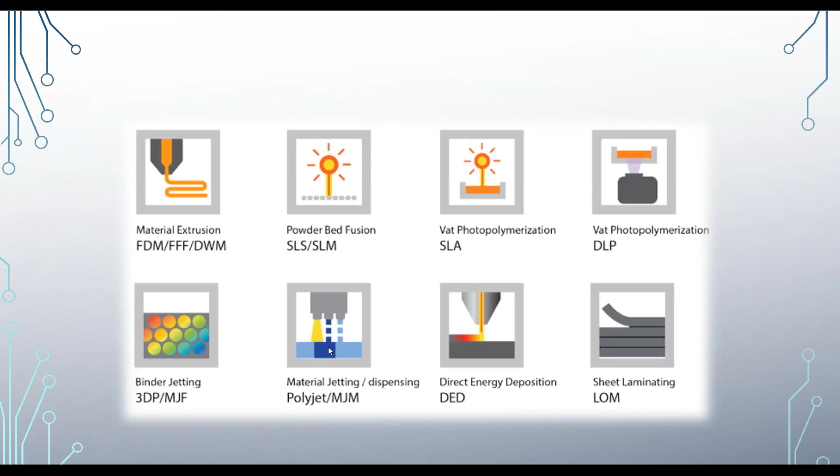The main focus of 3D print technology we're going to look at today is the process known as stereolithography. Stereolithography is the process of solidifying a photopolymer resin layer by layer that is activated by a UV light engine. There are a total of 3 different types of stereolithography.

When people do their research, most will think stereolithography just means using a laser, which is on the left-hand side. This is the very first form of stereolithography, but it also goes out into DLP, which is the most popular, and then there's a newer form of stereolithography called mask SLA.

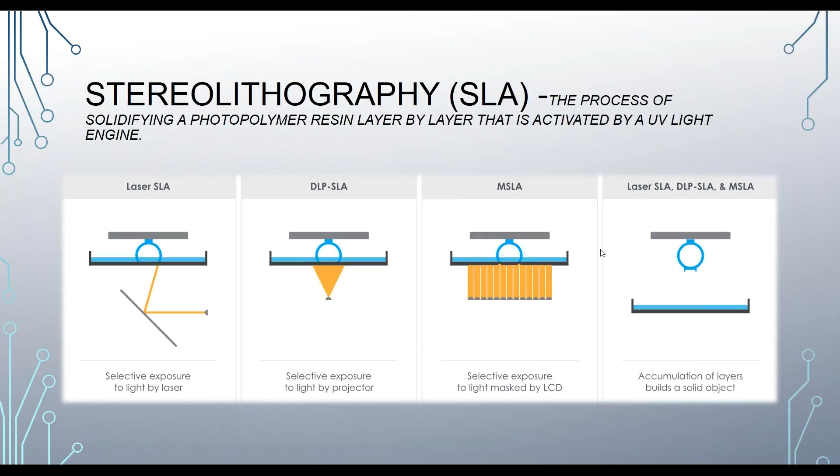Let's see a further breakdown. All of these are stereolithography, but there are 3 different types. The least expensive type you'll see out there today is stereolithography laser. We have a UV laser as a light engine, and a series of mirrors that directs the laser into the resin vat to cure the resin to the build plate. The 3 main competitors I see in the dental industry right now are Formlabs, DWS, and XYZ has a 3D printer that prints with stereolithography laser.

There is a downfall to this technology because it uses a laser. It takes a long time to actually print the object because it has to draw the full image for each layer being cured. So it's a very slow process.

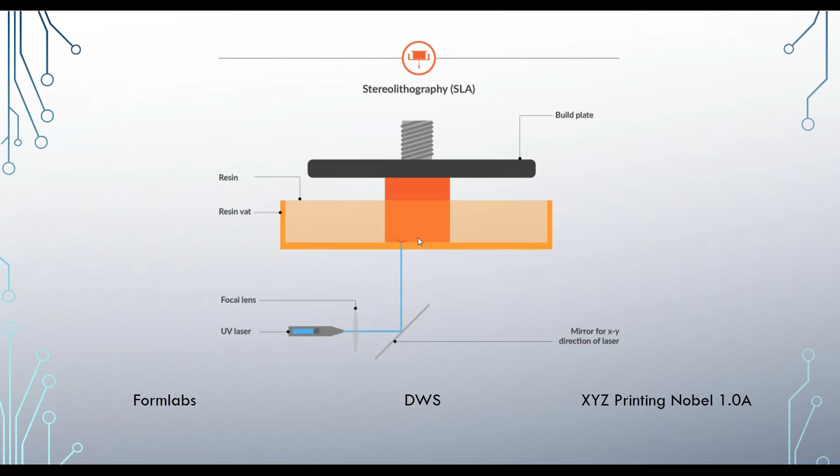The most popular in the dental industry right now is considered DLP stereolithography, digital light processing. This is an extremely cool technology that's the most popular in the industry right now. It actually uses a DLP chip, invented by Texas Instruments. The process works with a DLP projector at the bottom that projects the whole slice all at once to cure, the whole layer all at once, and it repeats that process over and over again.

So what would take the stereolithography laser method maybe 10 seconds a layer or even longer, it's going to take a DLP projector just 2 to 3 seconds to cure a whole layer, depending on the resin type.

Now the main game players we see with this type of technology is obviously ASIGA, which Whip Mix distributes for in North America. There are different competitors out there too, like Carbon which uses DLP technology, NewPro 3D, EnvisionTEC, Kulzer, which is also a B9 Creations printer, SprintRay, Kudo3D, 3D Systems, and Ackuretta.

This is the most popular form of technology for dental 3D printing. It's going to be the fastest, and it's actually the most accurate to date.

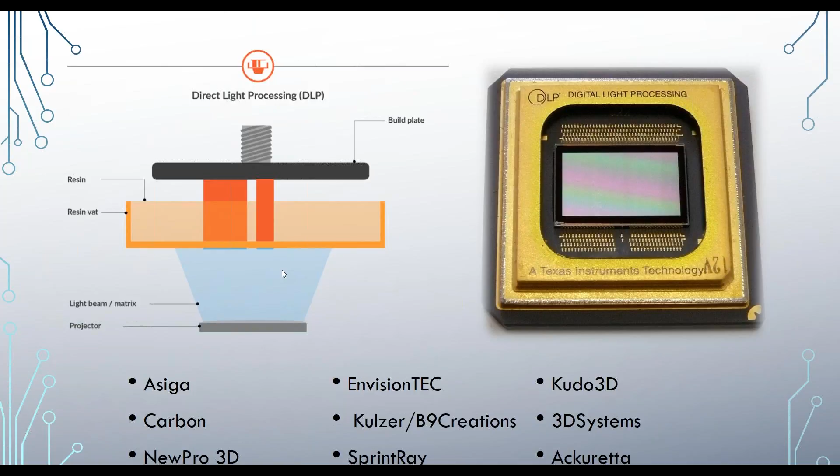Now there's a new form that has come out, very similar to DLP, but instead of using an actual projector itself, it has an LED light and an LCD mask, which masks light out and allows the image to shine through. This is really cool technology, it's really inexpensive, and it's still in the process of becoming more reliable.

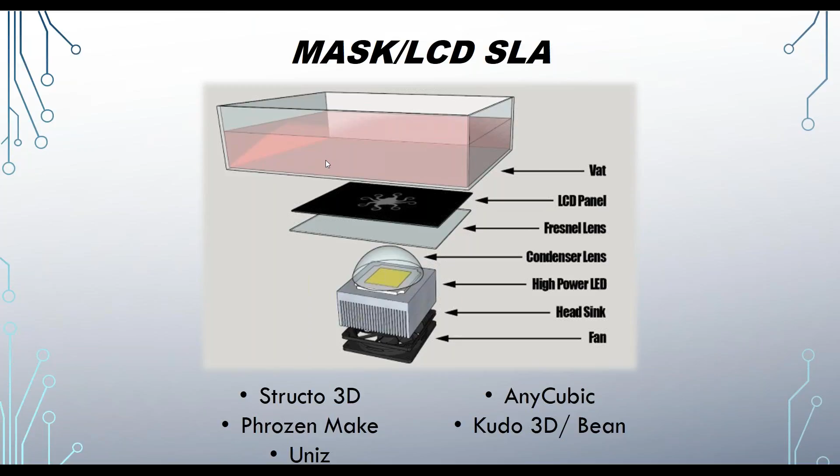The main players we see in this would be Structo 3D, Phrozen Make, Uniz, Anycubic, and Kudo3D has a Bean printer. It's very cool technology, but it hasn't been proven for accuracy that I've seen yet. I think we'll probably see it become better over time.

Now a lot of questions I get are like, they'll purchase a 3D printer and watch it work, but they don't really understand how or what is actually going into it. So how does my 3D printer really work?

As we can see on the right-hand side, there's an animation happening showing the separation process. The very first layer of any 3D printer for stereolithography is going to have a burn-in layer. This is the most crucial layer, because if the burn-in layer does not stick to the build plate, then nothing thereafter will.

After the burn-in layer, we have what's called the normal layers. With that, there's a reduced exposure time needed to cure the actual layer itself, the layer thickness, and then a little bit of bleed-through to allow it to adhere to the previous layer, which is known as cure through.

After that, there are some speeds that need to be taken into consideration depending on how fragile the resin can be, so that'd be approach and separation speeds. There are delays between the layers: after approach, after exposure, after separation.

Another part that goes into 3D printing for stereolithography is XY scaling, which compensates for the amount of resin or how much the resin is shrinking. And then there's XY compensation, which compensates for growth.

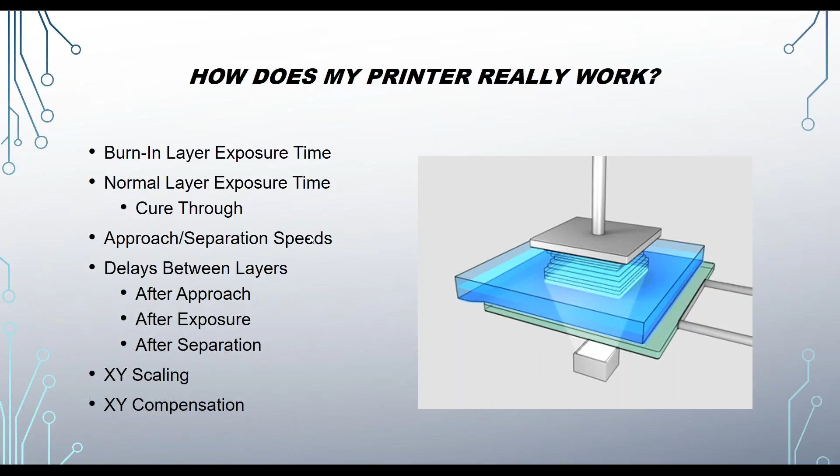As I mentioned earlier with the exposure times, there is a proper way of calculating exposure time. This is something you don't see up front unless you have a completely open source 3D printer. ASIGA, for example, is completely open source, so we can use any photopolymer resin from any manufacturer and calibrate it to work in the printer itself.

Each resin has a particular cure curve. The light engine is measured in a number called milliwatts per centimeter squared. So the actual dosage of light needed to cure the proper layer is milliwatts, the strength of the light itself, times seconds. That's how we can figure out the dosage of light.

So going a little backwards in thinking, if I wanted to cure using this table, on the bottom part of the graph, the X part, you'll see 100. This would be the amount of dosage needed. At a dosage of light of 100, you'd be able to cure a total thickness a little bit greater than 150 microns.

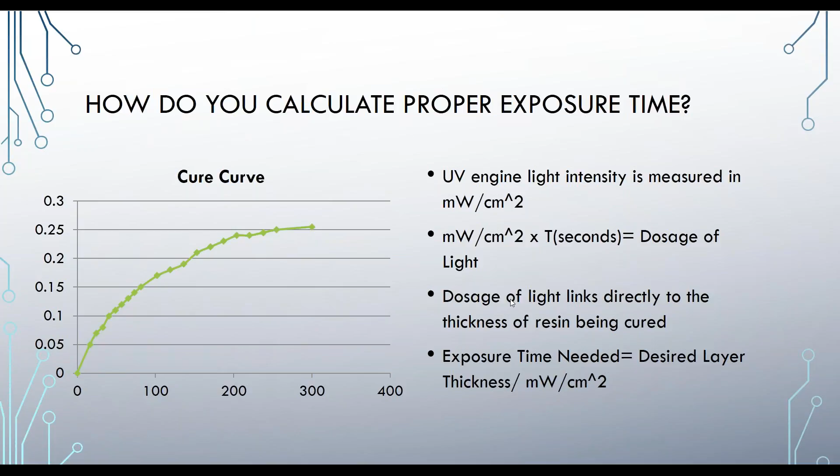So with that, I would take the light intensity, let's say 10 milliwatts per centimeter squared, and divide that into the dosage of light of 100, which would give me 10 seconds. So for this exact resin, if I wanted to cure 150 microns, I would need 10 seconds of exposure with that current light. This is a little more technical, I'd be more than happy to go over this at a later date with anybody.

When you're purchasing a printer, one of the most confusing parts is defining how accurate the printer itself is. For stereolithography laser printers, the XY accuracy is going to be as accurate as the laser itself. The most popular 3D printer for stereolithography laser has a minimum feature spot size of 140 microns, so the smallest feature you'll be able to print is 140 microns.

Now DLP uses pixels, so if you're looking at your computer screen, that's made up of thousands of pixels. It's similar technology for the DLP projector, and that can have a minimum pixel size I've seen down to even 25 microns, extremely small, which would make it extremely accurate. Mask SLA is very similar, it has a pixel size as well, which I've seen around 75 or 100 micron XY pixel size.

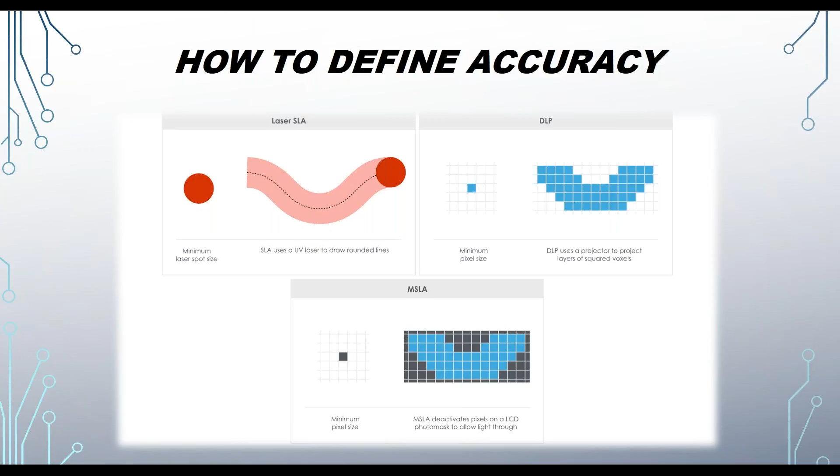So when we're looking at 3D printers, if they state you have an XY resolution of 25 microns, that's going to be extremely accurate, versus let's say if they have a printer that says I have an XY resolution of 140 microns, it is not going to be as comparable for precision. It will never be able to get the proper amount of detail.

Something else that's confused is Z resolution. I see this on a daily basis, I look at 3D printers every day from other manufacturers, and I always like to see what their resolution is defined as. A lot of competitors will only show the Z resolution. Well, Z resolution really doesn't define the true usable accuracy, it's more or less going to give you a higher quality surface finish.

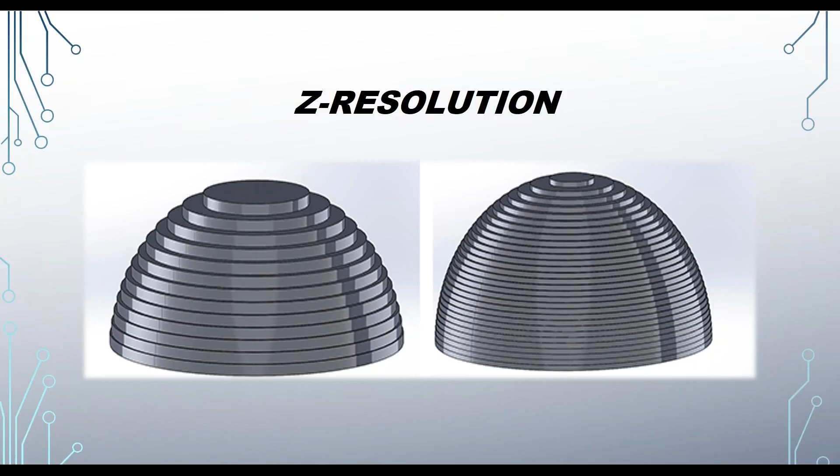So we can see between the two structures, the structure on the left has a more stair-stepped feature versus the object on the right. Now there's a trade-off. If you go into a higher Z resolution, printing in thinner micron layers like 50 microns versus 100 microns on the left, the object on the right is going to take twice as long to print versus the object on the left.

So this is something you'll have to work through with the end users, figuring out what layer thickness you want to print a structure in. But whenever you're looking at 3D printers and they're defining the accuracy, make sure you look at the XY precision first. If that is not below 100 microns, I would not even entertain it as a dental 3D printer.

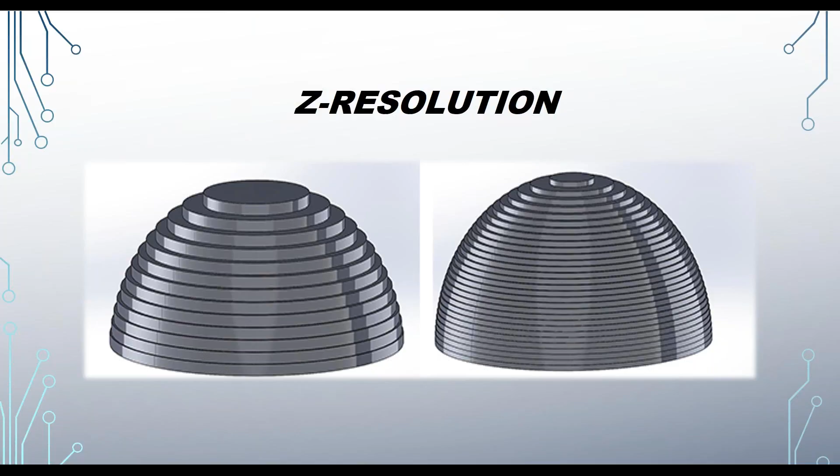For Z resolution, you'll want to see really anything. If you can get down to 25 microns or 10 microns, that's great. But realistically, mostly everything that all of our laboratories print is going to be at a 50 micron resolution up to 100, depending on the object itself.

So if anybody has ever received a model from our print services here at Whip Mix, and received a dental model from the Asiga 3D printer, the first thing most people notice is that the surface quality of it is so smooth. This is how the Asiga printer is able to achieve that. So if you're looking at 3D printers, make sure they have this feature of anti-aliasing. It's super cool.

Besides stating on paper what a printer can actually achieve, we need to show the actual precision at hand. So how can we prove the precision of a printed object?

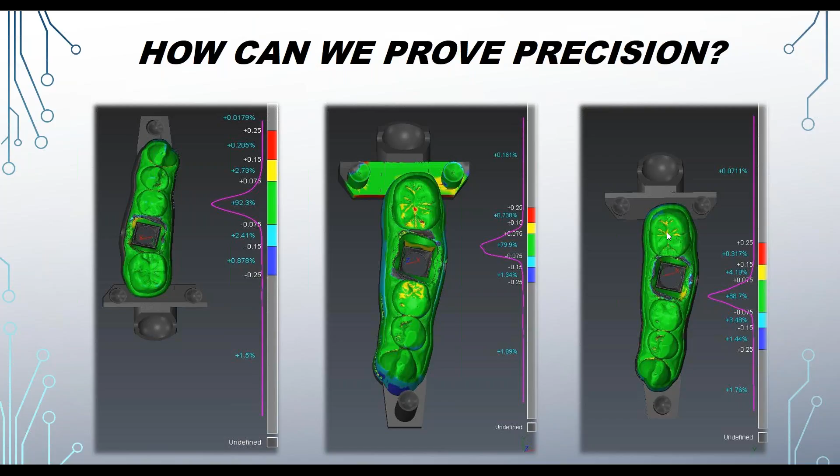So how can you compare this on your end? It's very easy. If you have 3Shape, exocad, or dental wings, there's a process for doing this. With 3Shape, if I wanted to compare my printed models to the digital model to check if I'm losing precision or questioning their accuracy, I'd simply create an order form for a coping.

I'll place a pre-preparation scan as well. From here, when I open up the scan software, I'll scan the model that I printed, and for the pre-preparation scan setting, I can import the scan.

On the bottom left of the order form in 3Shape, I can import an STL file or a DCM. So I'm going to import the STL file of the model that I sent to the printer and overlay the two.

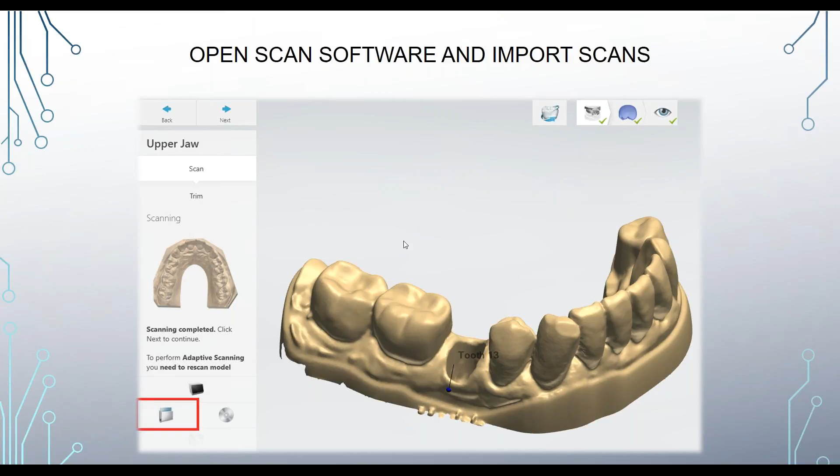After aligning those two, I can do a 2D cross-section and see where I'm deviating. This is a great way to do a quality in-house check on your 3D printer to make sure it's printing the way it's supposed to.

With this model, I had a difference of 65 microns on my interproximal contacts, which is pretty large. If I was to do a porcelain buildup on this, I would have made my contacts way too heavy, and the doctor receiving my final restoration would have been irritated that he had to adjust so much.

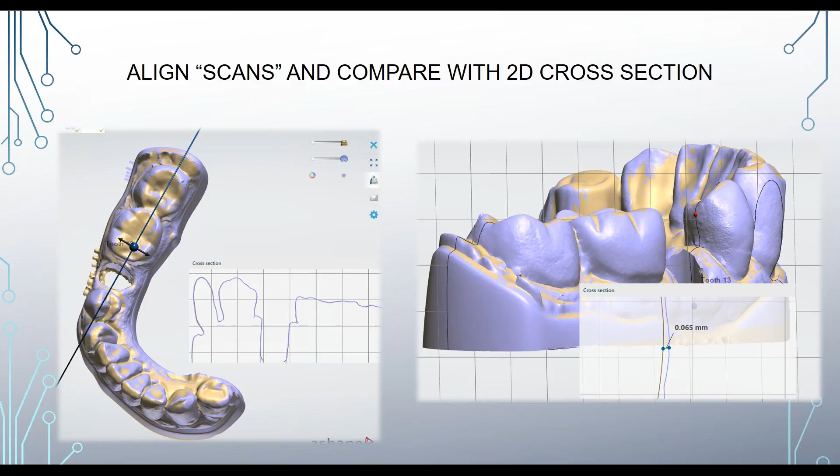So you'd have to go back to the drawing board and figure out if it's your printer or the resin you're using, or just contact tech support depending on who you purchased the printer from. This is a great way to check and validate that your 3D printer is printing accurately without purchasing an external comparison software.

So we've covered 3D printers, but here's what you need to know about 3D print resins—this information is extremely important. A lot of printers come in multiple wavelengths, 385 and 405 nanometers. At Whip Mix, we only sell the 385 nanometer light source 3D printers. The reason is it's a lot easier to work with—the light penetration is controllable, versus 405 which is not as controllable.

It's just all around better print quality for printing clear resins. You can actually print a true clear resin with 385 versus 405. They're going to have tints in it to actually allow the light from not penetrating all the way through.

Now, when you are choosing your printers, if you choose a 385 nanometer printer, you're going to have the best results with purchasing a resin that was manufactured around the 385 spectrum. The same way for the 405 resin, if you purchase a printer with a 405 light source on it, you need to use a resin that is manufactured for that 405 nanometer light source.

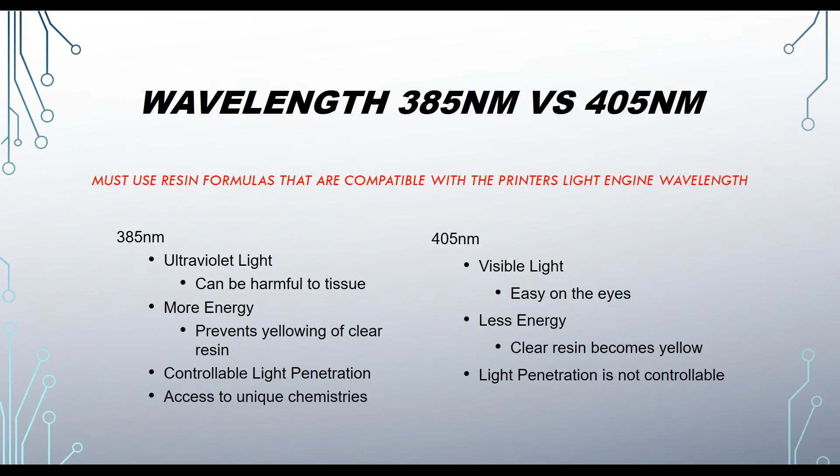So there are health hazards that come with handling resin. If you get it on your skin, you can actually receive rashes and have allergic reactions and dermatitis. So please wear gloves at all times when handling the resin itself.

I know when I first started, I'm guilty. I'd take a print directly off the build plate and grab it with my hands, put it in the alcohol, not realizing that I was exposing myself to multiple chemicals that can be extremely harmful.

Eye contact, if you put it in your eyes, just don't use it as eye drops. Realistically, it can cause issues with excessive tearing, itchiness, even damage to your eyes.

Inhalation as well. Some resins put off a lot of fumes during the curing process, and even in the liquid state, if you smell the different resins, some of them smell really bad. You don't want to huff that in or breathe that in. So depending on the resins, you will want to wear a face mask or a respirator, depending on how toxic it is. And of course, if you ingest any, you can actually become sick to your stomach or even vomit.

So please do not use this as hand lotion. Any of the resins, do not use it as eye drops. Do not breathe it in and do not drink it. It seems pretty common sense, but you're going to get it on your skin, or you could potentially get it on your eyes. So whenever you're handling resin itself, I highly recommend wearing gloves and even protective glasses if possible.

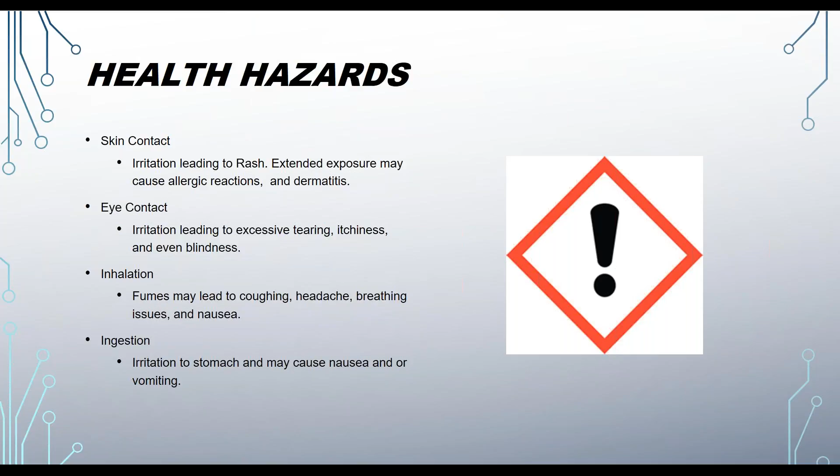Now, how to handle it? Wear an apron or a lab coat. It will stain your clothes, so if you accidentally get resin on your clothes, you will forever damage it.

A great example of this is one of our technicians was moving a resin tray with clear resin inside of it. It looked like it was an empty, brand new resin tray, and he lifted it up and tilted it back. It actually splashed all down his shirt, and it is forever starched. It's extremely stiff now, and you can't get the stain out.

So please, wear some sort of protective clothing, or wear clothing that you don't care if you get resin on it. Vinyl nitrile gloves, safety glasses, a mask depending on how strong the fumes are from it.

Now the ideal print environment is going to be clean, well ventilated. I cannot stress clean enough. Really, if you can put it in a dust-free environment, which is almost impossible in a laboratory, that'd be ideal. Or if you can keep it as far away from the model room as possible, that'd be ideal. Then if you can, have an emergency eye wash station. I know some of the larger laboratories do have that. We have it here at Whip Mix, obviously. And so if you ever get it in your eyes, you can immediately go flush your eyes.

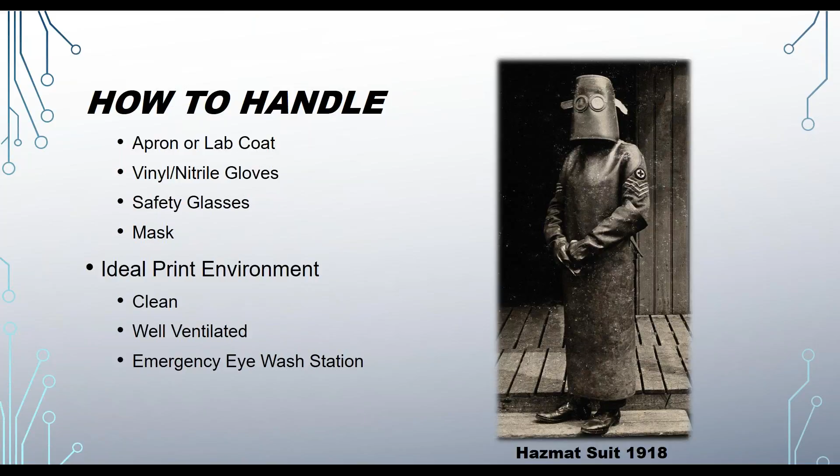So here's some tips for working with resin. When you're using it, it's extremely important to read the instructions of use, because that's going to tell you exactly how long it needs to be mixed for. It'll tell you the daily maintenance of the resin that needs to be handled before printing itself. So please read the instructions of use.

Some resins need to be heated up before using. Some of them do not. Some need to be mixed for 2.5 or 3 hours. Some need to be mixed for 5 minutes. So definitely read the instructions of use to get the best results from your resin itself.

Now, if you ever have any failed prints, a great way to clean your resin to remove debris is to use a paint strainer. I recommend a 200 micron mesh or smaller. The smaller you go, though, the longer it takes for your resin to strain. But 200 microns, or 0.2 millimeters, should be a fine enough mesh to strain your resin.

From there, storing your resin bottles, I highly recommend storing them in a cabinet. If your resin bottle has a lighter colored cap, light can actually bleed through that and solidify the cap onto the bottle, and it's almost impossible to remove. You have to get a couple wrenches out. So please keep those for best results, stored in a cabinet.

And then from there, resin trays, if you're not using them, almost all resin trays are going to come in a cardboard box. Go ahead and place that resin tray into the cardboard box when you're not using it, and then place that cardboard box into a cabinet to prevent light from exposing to it. It is a photopolymer resin, so if light gets to it, it can start to react and cure itself.

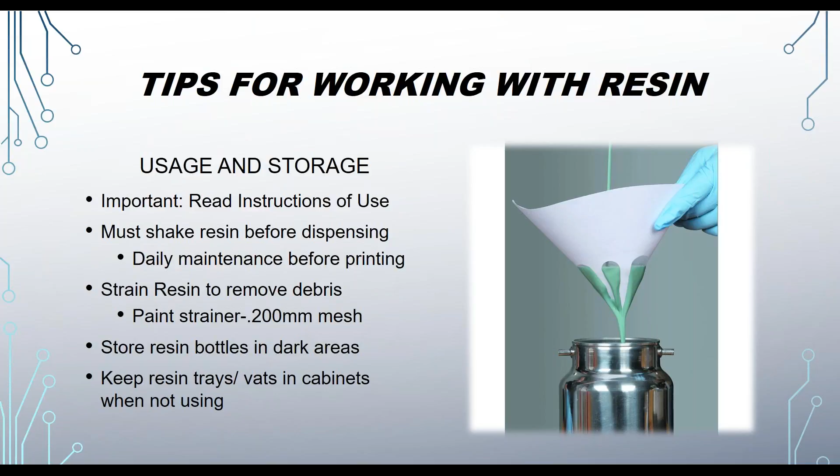So what do you want to look for when purchasing resin itself? If you have an open source 3D printer where you can use resin from other manufacturers, there are different areas you want to look at when choosing the resin itself.

Right off the bat, you want to look for accuracy. Low shrinkage and low warpage are two things you want to look for immediately when choosing a resin. The higher end brands like Whip Mix, Detax, Pro3dure, NextDent are going to have lower shrinkage values. If you go to brands like Fun to Do resins or Maker Juice, those resins are going to have higher shrinkage and extremely high warpage. So they'd be fine for creating prototypes or toys, but not great for dentistry.

A third area you want to look at is making sure the pigment stays suspended. Resin itself is very similar to paint. They have pigments, blockers, and photo initiators inside the resin, and over time they'll settle out in the resin tray or bottle. So you definitely want to mix it up before using, but if you have a resin that can suspend pigments for a longer period of time, you'll spend less time stirring your resin and more time printing, which is what you want.

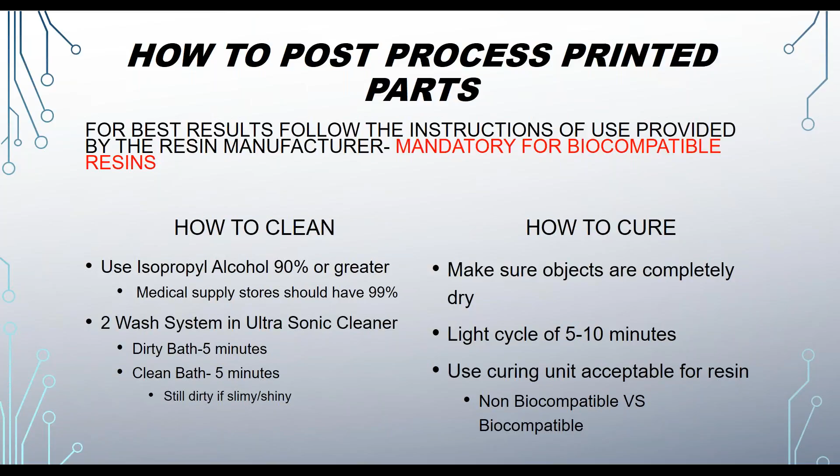Now, for the acceptable curing unit you want to use for your resin, you want to do the research. If it's a biocompatible resin, it may need a curing unit that requires heat and light together, or an oxygen inhibition layer and light together. Versus if it's a non-biocompatible resin, you can use just about any curing unit that fits in the light spectrum that the instructions of use require. So you definitely want to do your research.

Now, I do have a video of how to remove objects from the build plate. There are some ideal tools for this that I recommend: a number 2 X-Acto knife handle—make sure it's the number 2, it's the wider handle, the number 1 is too small—and then a 1/2-inch wide X-Acto chisel blade and a jeweler's hammer.

So I actually have a video here of Whip Mix's own Brandon Smith. Let me go ahead and pull this video up. Now, it may be a little hard to hear. If you have any issues hearing it, we will send this link to this video afterwards, and I'll try to also commentate for it.

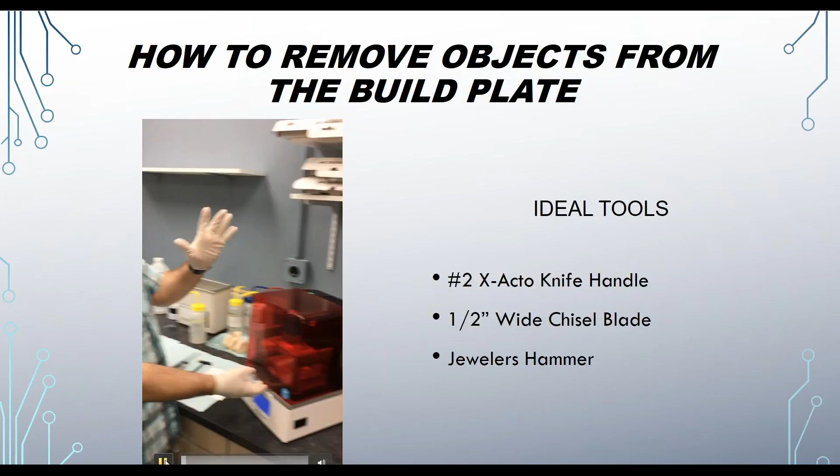All right, this is Brandon Smith with Whip Mix, post-processing models off of the Max printer. The post-processing is the same for the Max as well as the Pro 275.

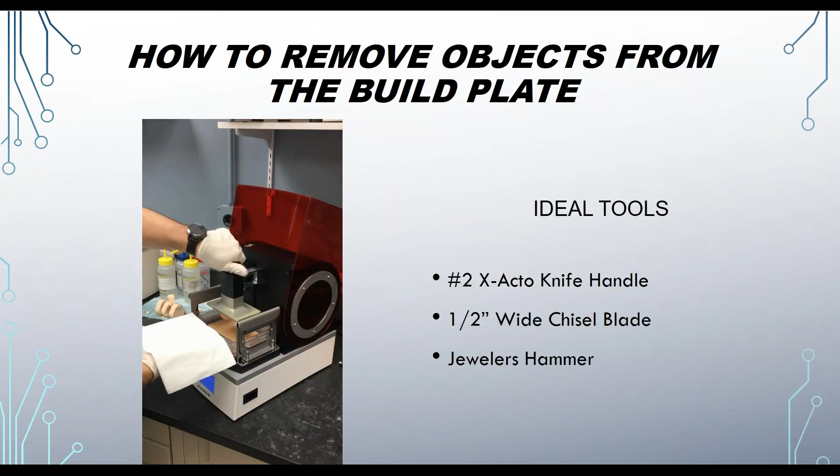So what he's going to do is place the models to the side, using an X-Acto knife chisel blade and a gold-tipped hammer to remove these models. You simply place the chisel blade right to the base of the model and slowly tap. You can see with that tapping, the blade itself will get underneath the edge of the model, and then the model will just pop right off.

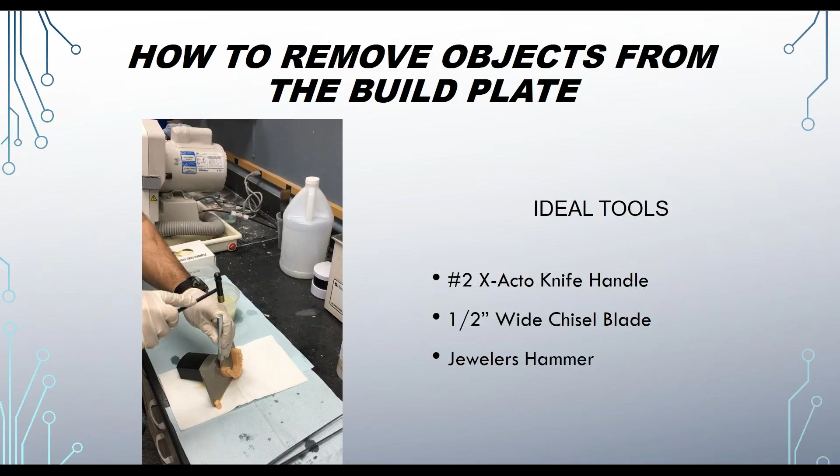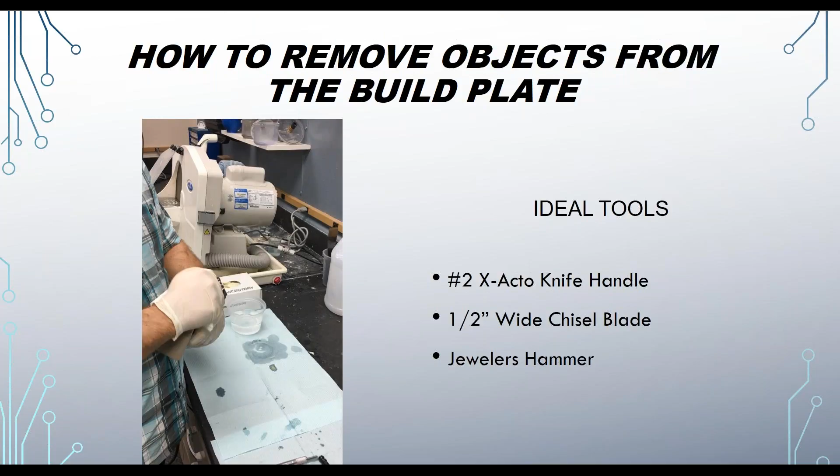For 5 minutes in the ultrasonic, and then we'll put them in a clean bath for an additional 5 minutes in the ultrasonic. Once they come out of here, they'll go into a light cure box for an additional 5 minutes, and then that finishes out the post-processing. Just make sure that before you put them in the light cure box, you have completely dried the models, with no resin or alcohol residue left on them, so that when they come out, they're not tacky.

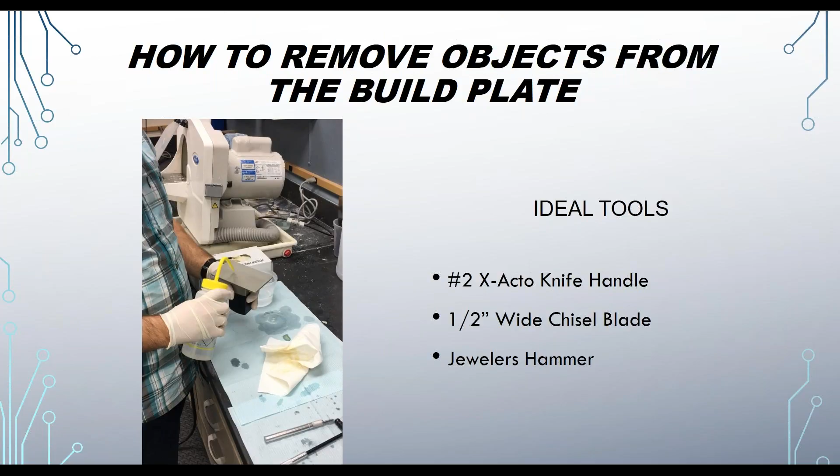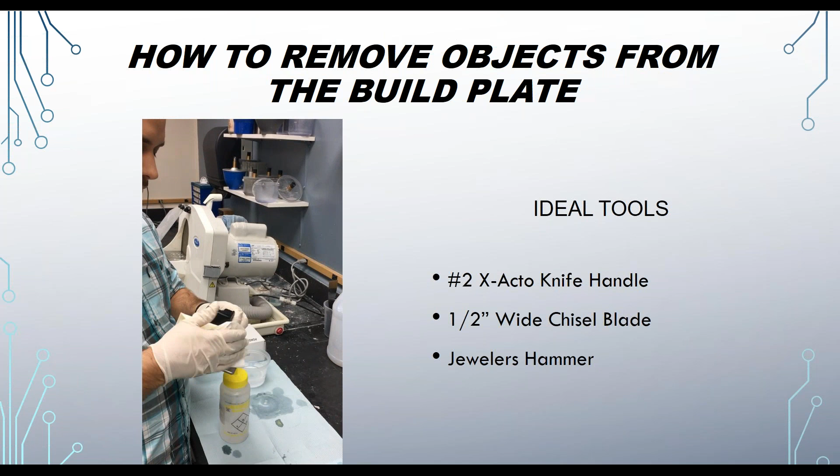To clean your build head, just use a regular paper towel and some of the alcohol you use for post-processing, which is just regular IPA alcohol—you can get it at any drugstore. Squirt a little on your build head and just wipe it down. Make sure that when you do this, you always wear gloves. This resin can be toxic before it's cured, so you don't want to expose your skin to it. Once you clean your build head, it goes back in and you're ready for your next print job.

And total post-processing, 15 to 20 minutes? Yeah, about 15 to 20 minutes. Thanks, Brandon. You're welcome. So we'll send that video to everyone.

As you can see, it's extremely easy to remove the objects using these tools. From there, you'll take the models out, put them in the first bath of alcohol, considered the dirty bath, and run that for 5 minutes or so, depending on the instructions of use. Then you'll take the objects out and place them into the clean bath for another 5 minutes, bring them out, let them air dry or blow them off with compressed air, and then place them into the UV curing unit required for that resin.

If it's unpolymerized resin, so uncured resin, it's hazardous to the environment. If you need to dispose of uncured resin or contaminated resin that you cannot cure, you'll need to check with your local government on how to do this. This is regulated at the city level.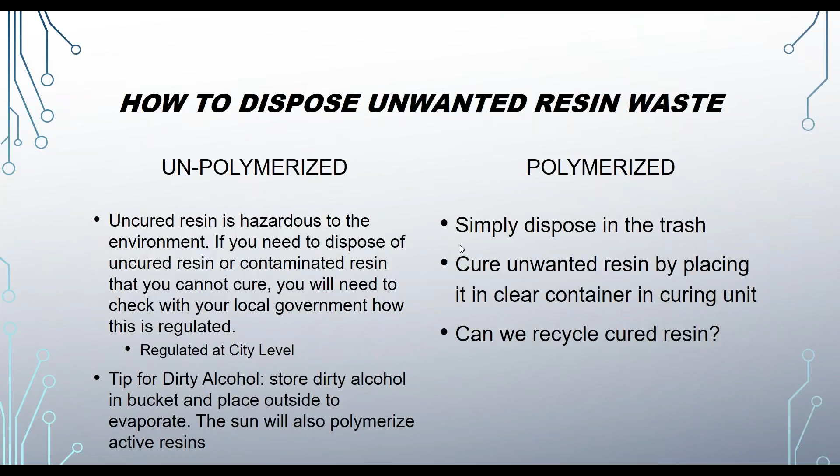All right, so I have some 3D printing design and support tips for you guys.

The most popular thing 3D printers are currently used for is models. Obviously from intraoral scans, or if you're scanning impressions, for most cases you're going to want to have a model to check to. So these settings are going to be set in 3Shape for the model.

Another setting you want turned on is the side drain holes. In 3Shape, they're set as 3x3 circles, and they default at 10 millimeters apart — don't go any greater than 15. What this does is allow the resin to breathe throughout the printing process.

If this was a hollow model but the sides are all solid, when it goes to close that hollow structure, it's actually going to trap resin and create a force, a vacuum. When it closes off the model and pushes down, it can deform the layers. So it's extremely important to place those holes on the side of a hollow model to allow resin to breathe in and out during printing.

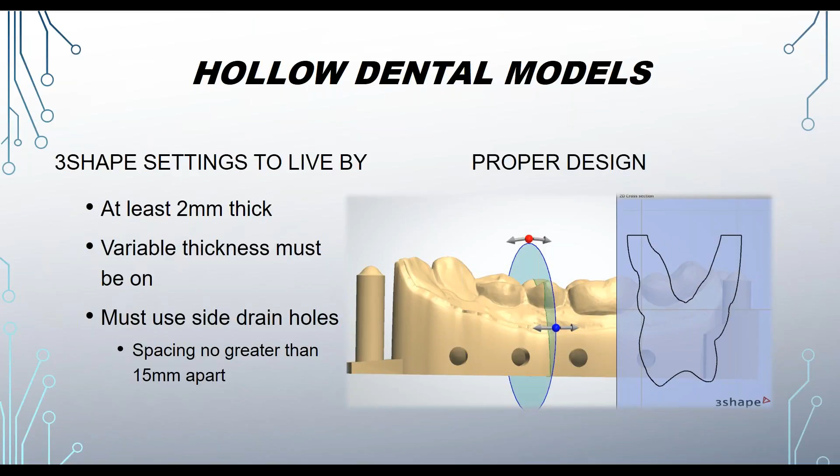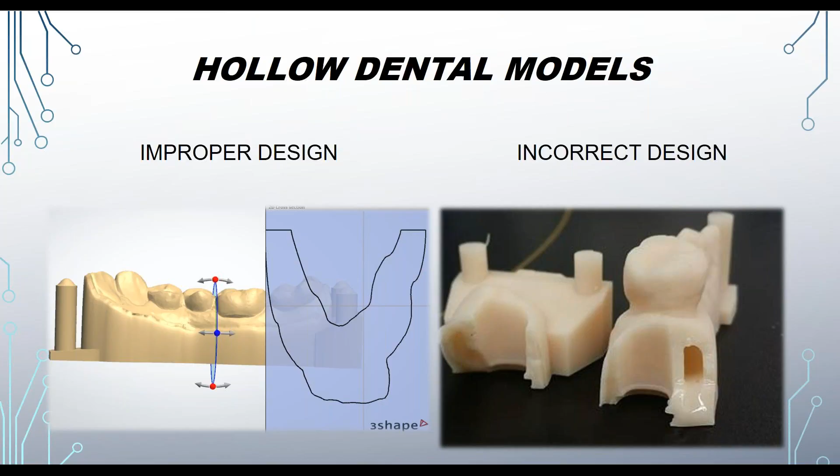The pin type, you can do die-shaped pin, which is what we prefer. The die shape, you can either do standard or free. Standard is going to be square, free is going to follow the shape of the margin line. The base height needs to be at least 5 millimeters.

The pin height needs to be, I recommend, at least 2 millimeters. Then the settings to actually get that taper along the edge from where it goes from the pin to the actual die, that's a combination of two settings. You want a base stop surface width of 0.1 millimeters and a base stop surface angle of 40 degrees.

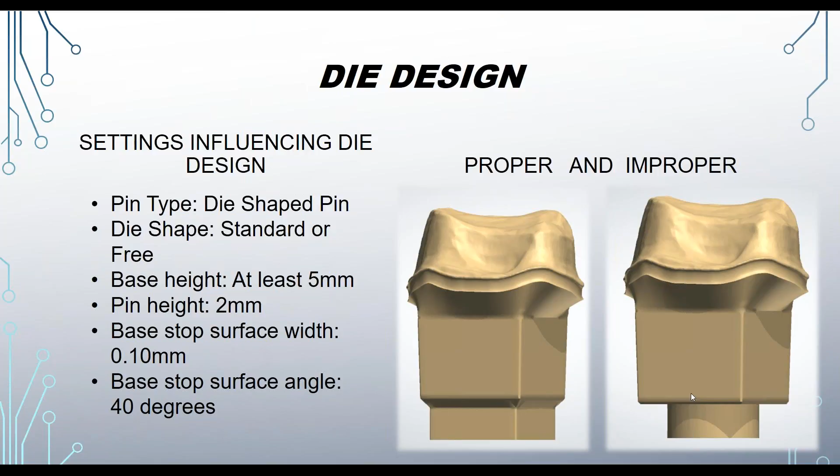So speaking of removable dies, there's a formula to actually achieve this. Whenever somebody purchases a printer, they'll go ahead and use the standard setting for Model Builder, whether it's ExoCAD, 3Shape, or Dental Wings. And if that die does not fit that socket, they assume the printer is inaccurate.

Well, that can be true if you have a very low quality printer, but if you're using one of the higher end printers, it's not so much the printer that's inaccurate, it's that your settings are not appropriate for the material or the printer technology.

So the removable die formula, this is if you're using a DLP 3D printer or a mask SLA 3D printer. This doesn't really work that well for laser-based stereolithography, like the Formlabs printer, but this is going to work great if you're using a DLP or mask SLA.

So the pixel width is defined by the XY accuracy of the printer. For example, on our Asiga Pro2 75, it has a 75 micron pixel. So with our Whip Mix VeriModel OS removable die settings, we have a die to model spacing of 100 microns.

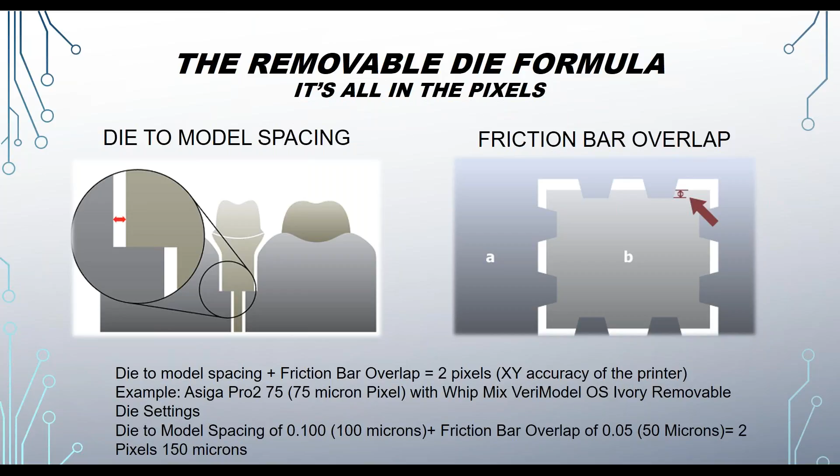Now, castable resin design and support tips. For the wall thickness of a castable, this is all going to depend on the resin itself, but I would go no less than 0.3 millimeters, or what is described in the instructions of use.

Margin line offset should be no less than the XY accuracy of the printer being used. So the margin line offset of your castable design, if it's for a crown and bridge, should be no less than 1 pixel width. If it's less than a pixel, the printer won't be able to achieve that margin line, and you may potentially even have a short margin at that point.

Cement gaps, you should not change if the resin is scaled properly in the printer's CAM settings, so the cement gap should remain the same as what you're already using. If you're doing an RPD for the clasp and arms, you're going to want to start at 1 millimeter and then work your way down. Once again, this is going to be dependent on the actual castable resin and how strong it is.

And then for placing supports, you're going to want to put that on the non-prep surface or on the occlusal surface of your design. You obviously don't want to put it on the internal surface of a crown, because then it won't actually fit on the die.

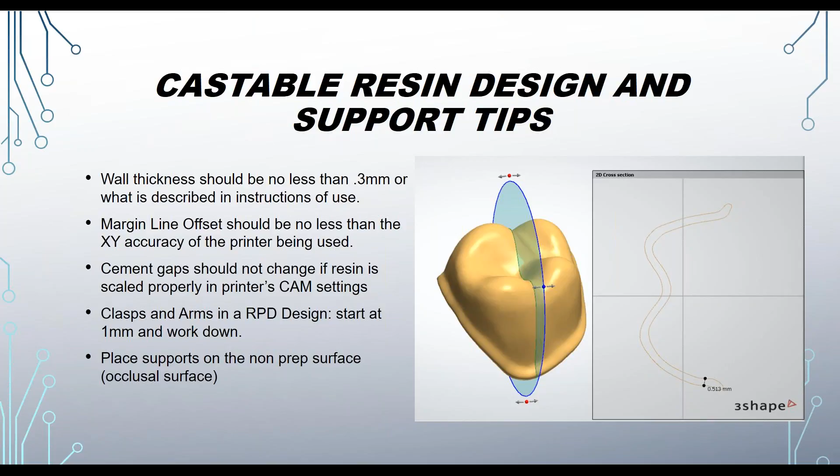Surgical guides and splint design tips. For surgical guides, I would make no less than 2 millimeters. The teeth to tissue, or teeth/tissue to guide offset, I'd recommend starting at 100 microns and then go from there. Once again, it's going to depend on the resin.

The sleeve to guide offset would be 50 microns, that's a great starting point. And then, of course, when you're designing your surgical guides, include visual aids. Place windows in the actual surgical guide, so when the dentist places it into the patient's mouth, he has a way to visually check that the surgical guide is properly seated.

In the patient's mouth. Splints, the wall thickness, you don't want to go any less than 1 millimeter. Occlusal thickness, no less than 2. The teeth to tissue offset is going to be similar to surgical guides, 100 microns. And of course, when you're designing your splint in the splint software, remember to block out undercuts during the design process.

For 3D printing, all of the materials that are available or will become available for splints are currently going to be a hard splint. It won't be a soft splint, so you will have to block out the undercuts for it to seat properly.

Now, I see this a lot. The support angle for how we're going to actually support a structure, horizontal versus 45-degree versus vertical. The most accurate, hands down, way to print a structure is to print it horizontal to the build plate. This is you actually being able to achieve the XY precision of your 3D printer. The prints are also going to be a lot faster, but it can be challenging to support objects with a larger surface area.

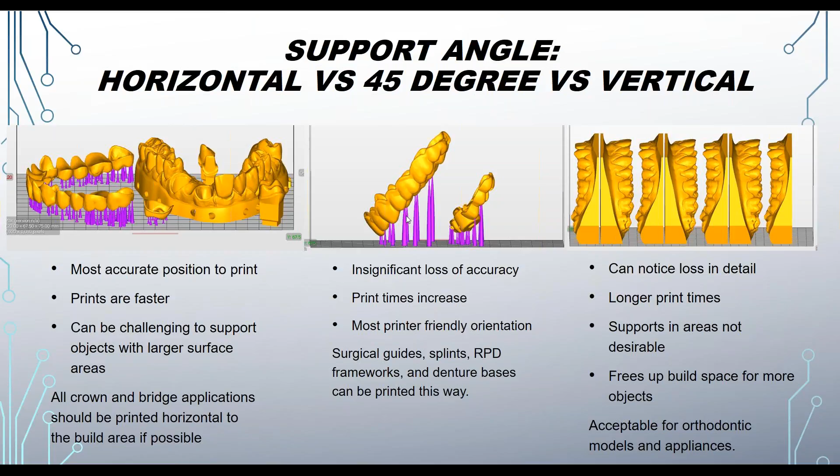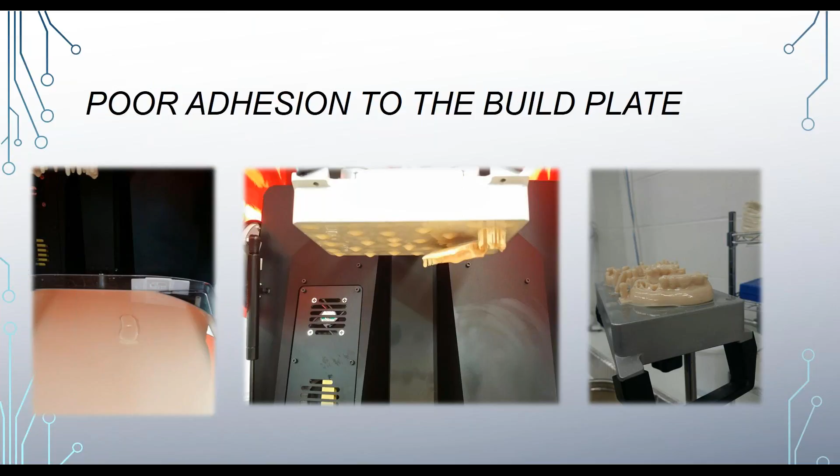Let's cover real quick the types of print failures and how to overcome them. Poor adhesion to the build plate is the most frustrating failure you'll have, because you waited 3 hours or so for the objects to print, the build head comes up, you're excited, and then there's nothing there, or there's delamination that we can see in the photos.

So how can we overcome that? The number one cause I see is improper calibration of the build head. It's not truly parallel to the image plane below it, or it's calibrated too far away from the image plane, so it can't have the correct exposure time for the burn-in layer. Or you could have selected the wrong material in the print settings - let's say we selected cast, but put model material in the printer. It's going to have incorrect exposure times. Dirty optics, if the glass the resin sits on is dirty, or if the mirrors are dirty, can cause failed prints. Or the resin may have a very high warpage characteristic, causing it to delaminate itself from the build plate.

So, resolutions: calibrate the build head to be parallel to the projection plane, and increase the burn-in exposure time. This is only possible if you have an open source 3D printer where you can tweak those settings if needed. You can create mechanical retention to the build plate surface by taking sandpaper and sanding it down. Now, if your build plate has a special coating on it, do not sand down that coating - check with the manufacturer before you do that. And then, of course, clean your printer.

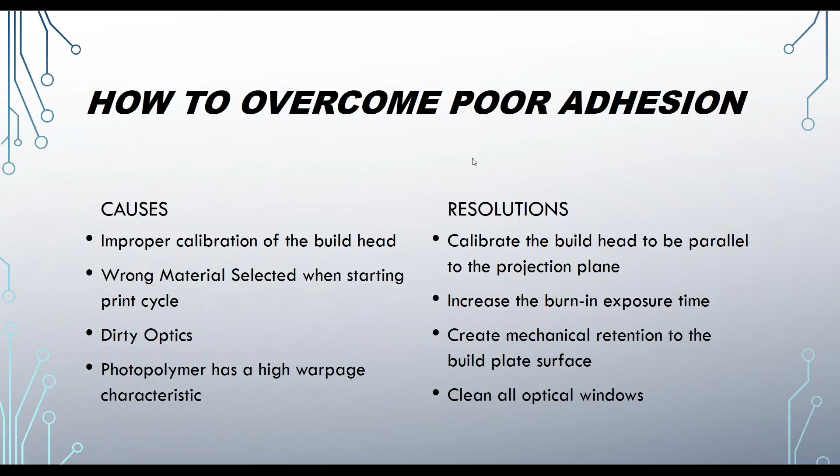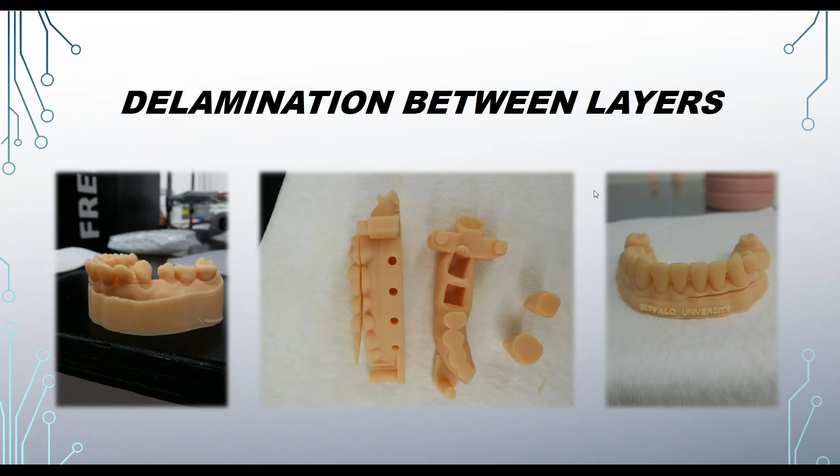The next form of failure we see is delamination - this is when you're printing along and all of a sudden half the model starts to split off. This is caused, number one, by improper normal layering exposure times. This happens if you have a fluctuation in UV light source intensity. We see this a lot with lower end 3D printers where the UV light source is just up and down - it doesn't have a high quality LED in it. If that light source drops halfway through the print, you can have delamination like that. Dirty optics cause that too. A worn resin tray, towards the end of its life cycle, can also cause that type of failure.

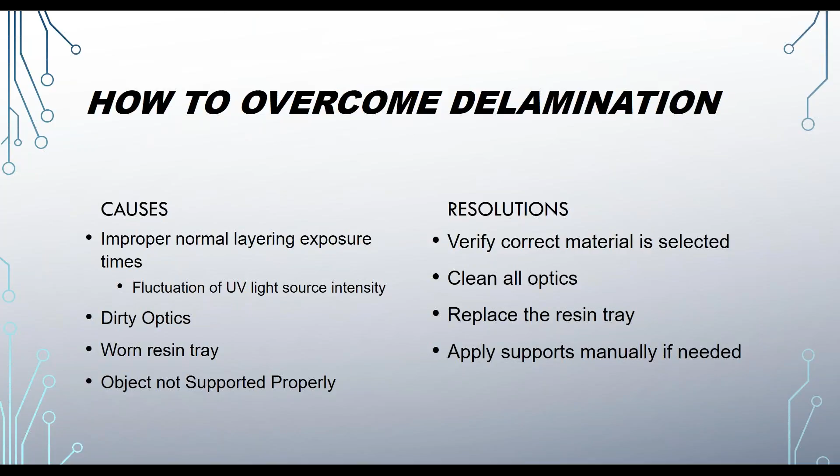Or if the object itself was not supported properly - let's say it didn't have proper internal supports - you can receive a delamination like that. Resolutions for this would be: first, verify you have the correct material selected for printing. Clean the printer, replace the resin tray, and then apply manual supports if the automatic support generation is not enough.

If you had a previously failed print and did not clean it, that can cause it too. So the best way to overcome this type of flash, if you see it, is to immediately strain your resin. Use a paint strainer, 200 microns like we covered earlier. Strain the resin, get all the flash out of it, then pour that strained resin back into the resin tray, and try printing again to see if you have the same issues.

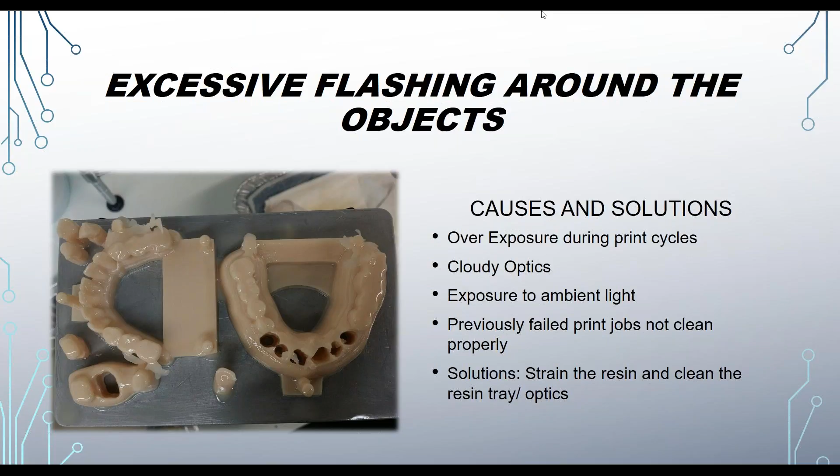Tips to reduce it: clean it. I probably sound like a broken record, but you need to keep your printer clean, especially anything that deals with the optics or light shining through. It needs to be cleaned on a regular basis, even daily, depending on how often you use the printer. Use the auto support function, and if you're having some sort of failure with that, increase the support contact width if you can.

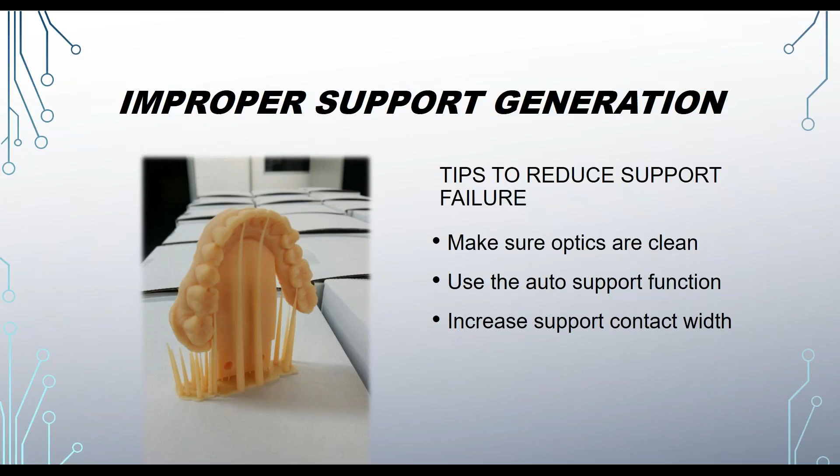So I get this question a lot: can we save a failed print? The answer is no. Once a print has failed, you have to start over.

You'll have to clean out the resin vat, pulling out all the objects that are stuck to the resin vat itself, and you will have to clean off the build head before you start your next print. So you'd have to start fresh, unfortunately. Unlike milling, if you failed or had an improper mill, and you leave the puck inside the mill, you can actually re-mill on top of it and hopefully recover the object you were milling. 3D printing is completely opposite. You cannot.

So for some 3D printing fun, there's a lot of free software out there that you can use. Most importantly, besides using a 3D printer for work, there is a way that you can have fun with it on the side as well. Some free software would be like Autodesk Fusion 360, which is a free CAD software, and Meshmixer.

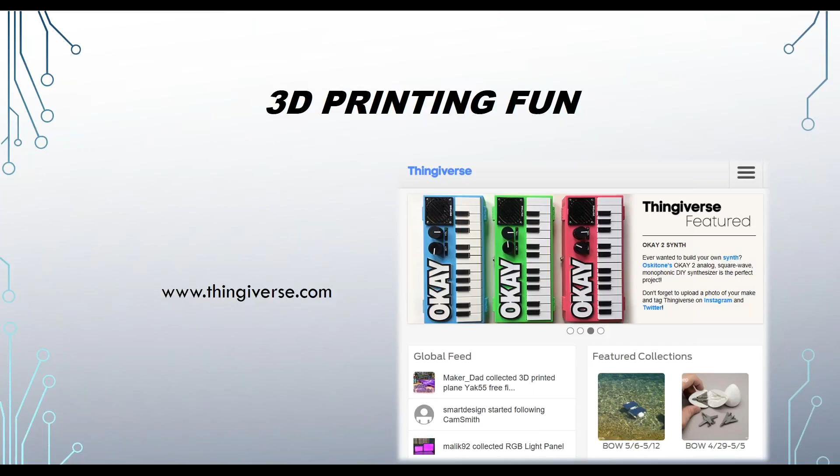And if you already want to receive STL files that you want to print, Thingiverse.com is a super cool website. You can download just about anything you could ever want in STL format and place it on your 3D printer, from remote control cars to toys to whistles, really anything. Super cool website, I highly recommend checking it out. Don't let the boss know, because they may not like it. But if you purchase an inexpensive hobbyist resin, you'll be able to print a lot of these structures and have a lot of fun with it.

So some key takeaways: do your homework before purchasing a printer, receive test prints and compare them. Find out if you have any sort of material restrictions for the printer you're purchasing. I highly recommend looking at open source 3D printers, so you can use any resin from any manufacturer. Read the instructions of use for everything, for the printer, for the resin, for everything. Design with 3D printing in mind. Keep your printer clean and take time to understand the technology and have fun.

So this is the conclusion of my presentation. If you guys have any questions, please feel free to ask. I'd be more than happy to answer all of them if we have time.

Okay Cory, there are a couple of questions. First one: how do you find the die to model spacing? So, how do you find that setting? The settings are in the control panel itself. If you're using 3Shape, if you open up the control panel, there's a section, I can't remember the exact wording, I think it's like model settings, over on the right hand side. You'll select that, and then you'll find die to model spacing and friction bar overlap. There's a header at the top with a column. You'll choose the material you're wanting to print with, and then you can modify that setting there.